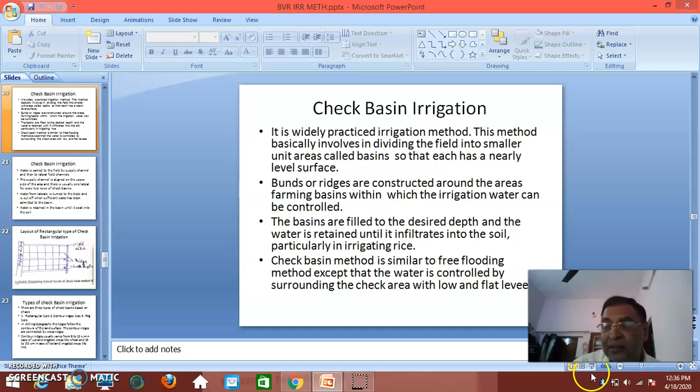So I will take a little more elaborate discussion on this, because water saving in this is very important. So what is check basin irrigation? It is a widely practiced irrigation method. This method basically involves dividing the entire field into smaller plots called basins. It's not actually small. In fact, each basin is of the size of around 0.5 hectares maximum, and even less than 0.1 hectare also. That means in local acres, a single plot is around 1 acre, or even less than that, or even more than that. So it's definitely not a small plot.

Bunds or ridges are constructed around the areas. So whatever area you want to enclose is constructed with these bunds and ridges, within which irrigation water can be controlled. The basins are filled to the desired depth, and the water is retained until it infiltrates into the soil, particularly in irrigating rice. So, between these bunds, the water level is raised to the required level, and then it is allowed to infiltrate. Of course, the check basin method is similar to the free flooding method, except that water is controlled by surrounding the check area with low and flat levees.

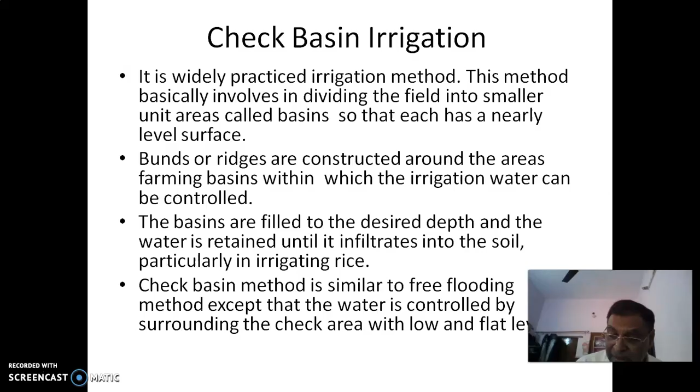So we will have the basin figure. It's hand drawn again. I will show you once. You can see these are the basins, check basins, almost rectangular in nature. And this is the supply ditch, and this is the field. In fact, for each field ditch, you can irrigate on either side like this. And these are the ridges and check basins. There is a collecting ditch also, you can see. Okay, so water is carried to the field by the supply channel. Just now we have seen the supply channel. This is the supply channel, supply ditch.

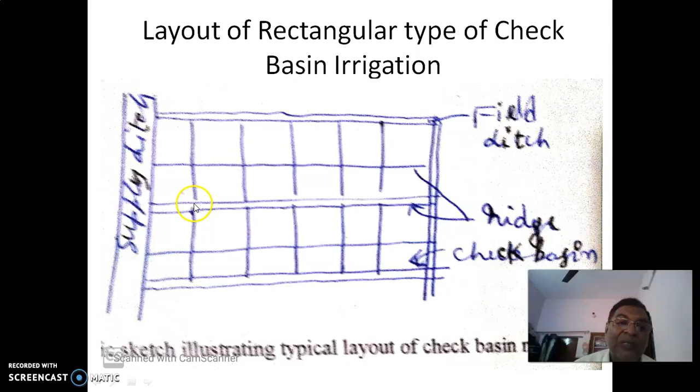The supply channel is aligned on the upper side of the area, and there is usually one lateral for every two rows. So this is the higher side of the area. You should have the supply channel on the upper side of the area. That means the water should flow; the slope should be towards this. That's very important. Water from laterals is turned to the beds or plots and is cut off when sufficient water has been admitted to the basin. Water is retained in the basin until it is soaked into the soil.

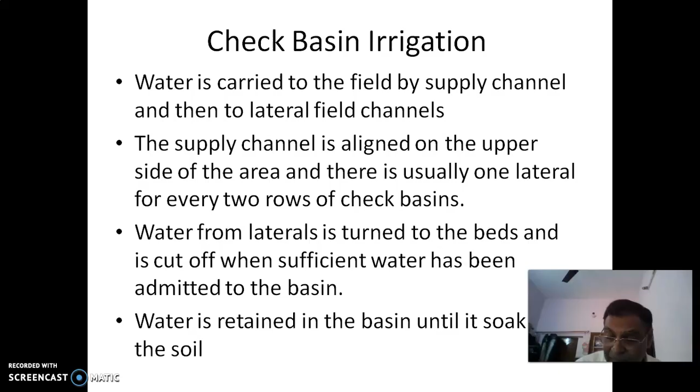So there are various types of check basin irrigation. It's not simply a rectangular type. This is one type. The contour ridges type is there, and then the ring basin type is there. In rolling topography, that means where slopes are changing very quickly, the contours of the land change. The contour ridges are connected by cross ridges. Let us again discuss this with respect to a figure. You can see here, this is again a supply channel, just like we discussed in the case of the strip basin.

Contour ridges usually vary from 6 to 12 centimeters in the case of upland irrigated crops, like wheat. Even wheat can be irrigated with this. It's not that wheat is irrigated only with the strip method; here wheat is also irrigated with this type. That's why it covers a very large area in irrigation. And it is 15 to 30 centimeters in the case of lowland irrigated crops like rice, because it requires standing water; that's why those ridges are higher.

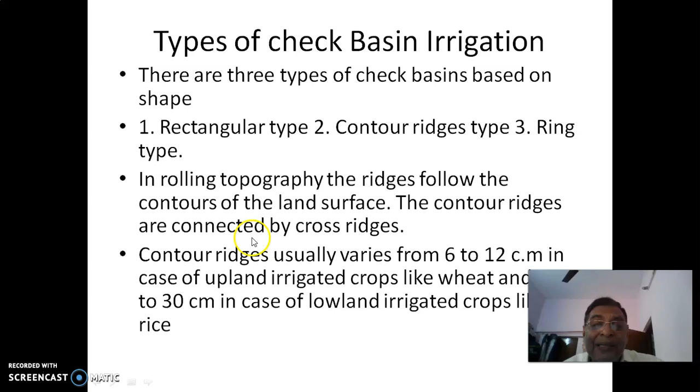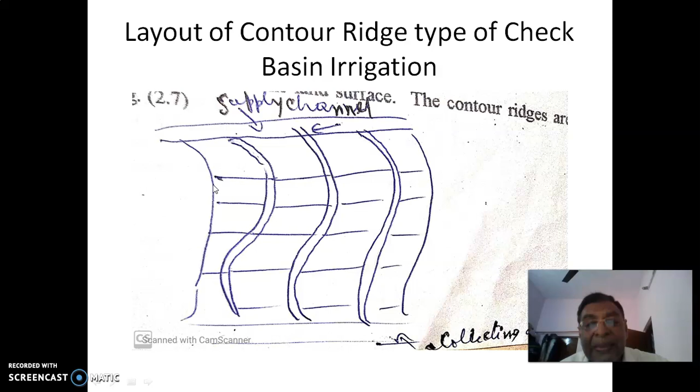So the contour ridges are connected by cross ridges. That's what I want to show you here. These are the cross ridges. This is a ridge, and this is a ridge, and one more cross ridge. So water is allowed here. Water is flowing like this, and when it is flowing, with these cross ridges, water is put here also like this. So this is how the check basin works.

Earlier we have seen the contour type; now ring type basin flooding. In irrigating orchards, square or contour basins may be used, but for other crops, like tree plantations, when plants are widely spaced, the ring method of basin irrigation may be adopted. The rings are circular basins formed around each tree. The ring basins are small when the plant is young. The ring size is increased as the plant grows.

So very much water is saved in this method, because only the ring area is applied, and when the tree grows, the water is supplied to the tree very much. Suppose this entire area is wetted, unnecessarily grass and other weeds will grow. So water is conserved. Many of the mango trees or any orchards for that.

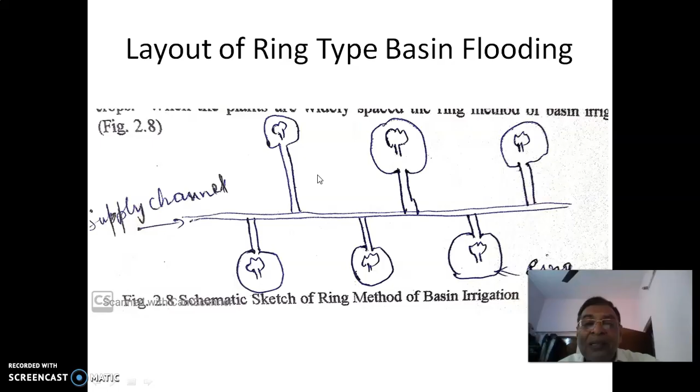Okay, so that's what. The ring basins are small when the plant is young. The size is increased as the plant grows. An advantage with the ring basin method is that the entire area is not flooded, thus obtaining high water use efficiency. This is very important.

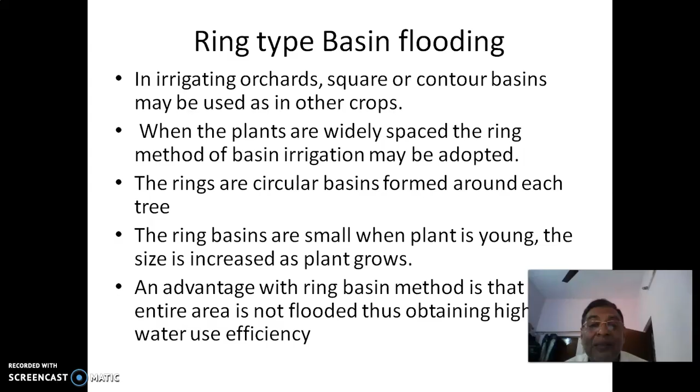So, what kind of lands are suitable for check basin irrigation? Basically, to have check basin irrigation, smooth, gentle, and uniform land slopes are required. You cannot have very steep slopes. Of course, for that you can have a contour, but even within the contour, at least a few widths of the land should maintain uniform slopes.

Soil having moderate to slow infiltration rates. It's not a very high infiltration rate. More or less like our border strip method. Practically all irrigated paddies are grown in basins. This is where I am emphasizing the fact: almost all paddy is grown in this type. That's why you have to save a lot of water from this.

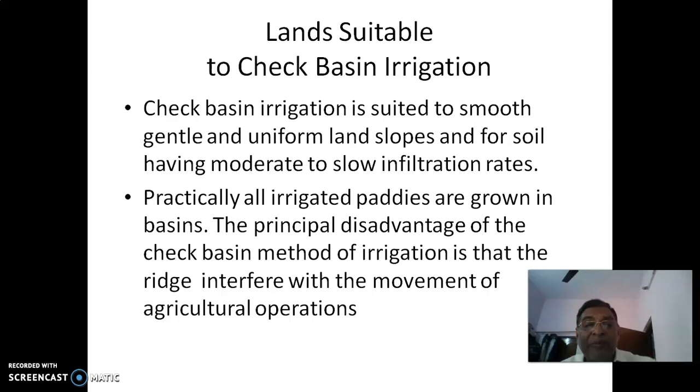The principal disadvantage of the check basin method of irrigation is that, particularly when the land is very quickly changing, when you are making smaller basins, it interferes with the movement of agricultural operations. That is another problem with this. So normally when the land is very flat with very little gentle slope, this method is very much suitable and used for mechanized farming also.

So now the design of the check basin irrigation. Normally the check basin design is that the water spread in the entire basin should be covered in one-fourth the time required to infiltrate the net depth of irrigation water. So for example, the net depth of irrigation water takes some time, maybe 2 days or 3 days or 4 days.

So in that basin, to cover that plot, suppose it is taking 4 days for 5 centimeters to get infiltrated completely. Then within 1 day, you should cover that basin. So that is a thumb rule like thing.

The hydraulics of flow in check basins may be considered to comprise 4 stages. Here I am considering only theoretically, because the practical things I will show you later on. Initial spreading of the entrance stream to cover the full width of the basin, and the simultaneous advance of the irrigation stream. Then advance of the water front after the initial spreading.

Then rise of the water level after the advancing stream reaches the downstream end. Once it reaches the downstream, how this water level is rising. Then subsidence of the stream after the irrigation stream is stopped. So these are the hydraulics.

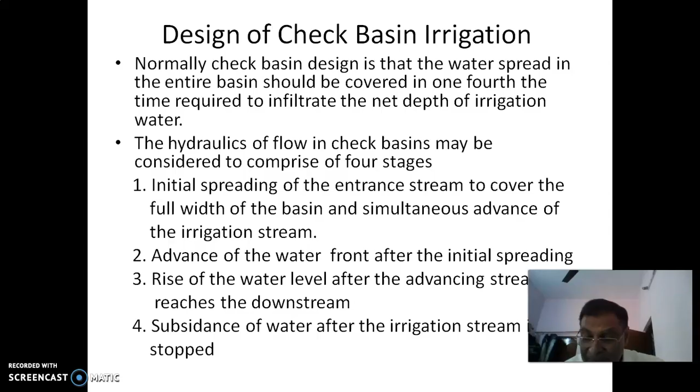The variables influencing the hydraulics of the check basin are in general the same as in border irrigation. These things we have discussed in the border also, but the essential differences in the phenomena are in the initial spread of the entrance stream to cover the full width of the basin, and in the characteristics of the recession flow. Normally, basin sizes vary from 0.1 hectares to 0.5 hectares depending on the slope of the land.

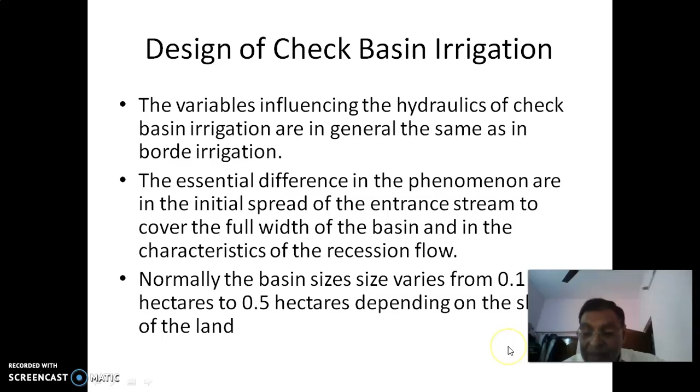So let us see some of the FAO guidelines that are there, and practically how the basin sizes can be referred to. I will show you later on. When you go further, of course, design of check basin irrigation, you can see here.